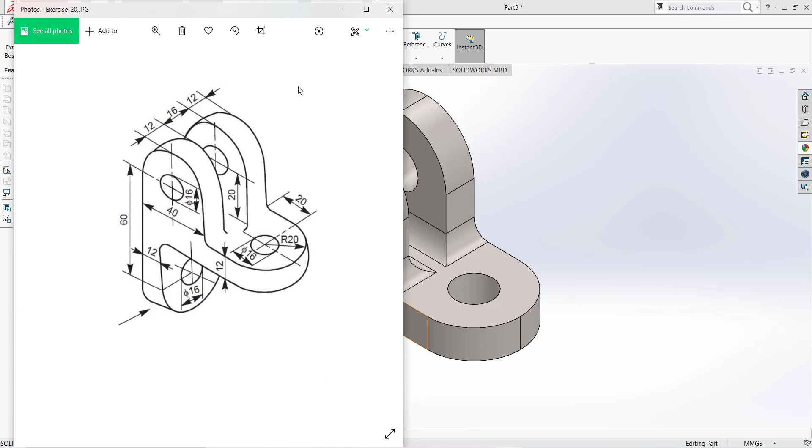Today we are going to make this exercise with the help of this sketch, and this is our exercise number 20 in SolidWorks. You can also download this exercise and this part from my GrabCAD link in description. If you have any doubts, please comment and subscribe to my channel for more tutorials.

So firstly we draw this portion, after that this one, and this is our last portion. This dimension is 40 millimeter and 40 millimeter, 80 millimeter length and 40 millimeter width.

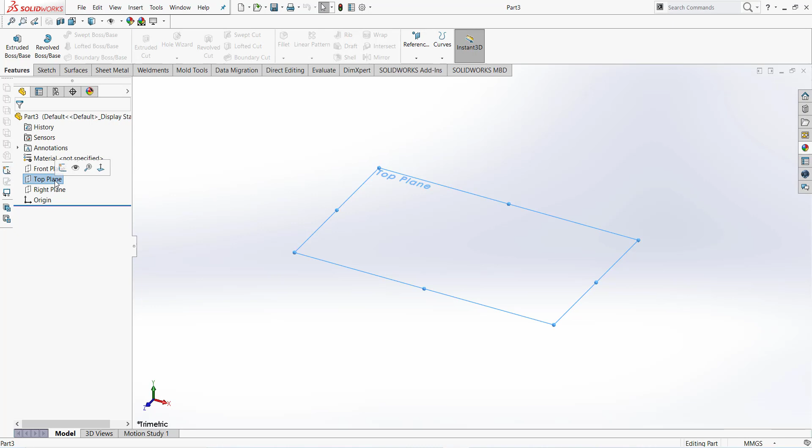Let's take a plane and draw a rectangle. Now dimension this is 40 millimeter and this dimension is 80 millimeter.

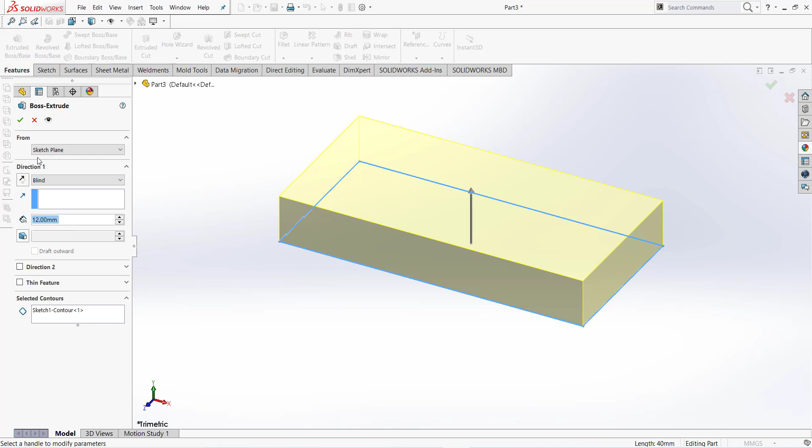Now extrude, length is 12 millimeter. Now fillet this portion on this edge and this edge, dimension is 20 millimeter. So first portion is ready.

Now we draw a 16 dia hole on this face. This dimension is 20 and 20 from center, the 40 millimeter, and this is also 40, and 12 millimeter thickness.

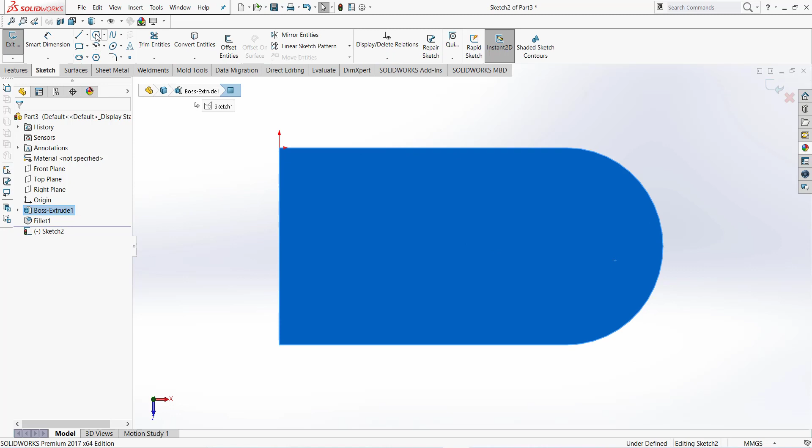Let's click on this face and take extrude cut and draw a circle. Dimension it, this is 16 millimeter. Finish sketch and through all, click OK.

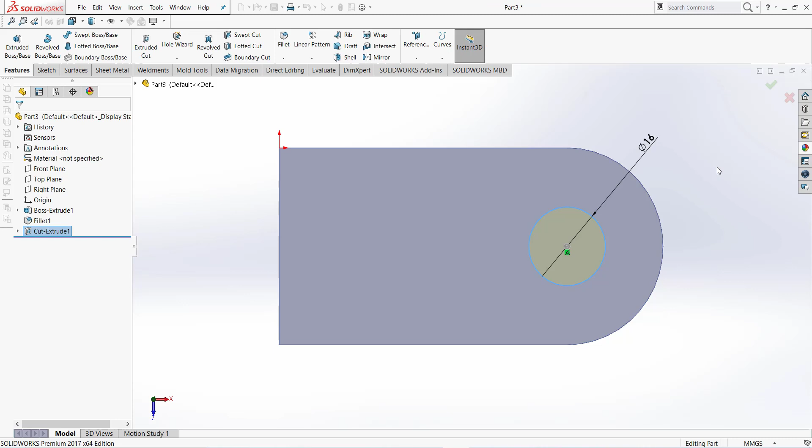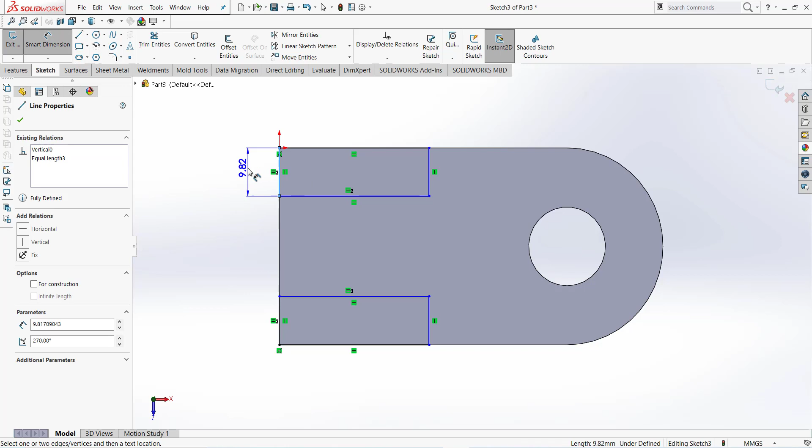Now go to sketch and draw two rectangles like this. This portion is equal and this one also equal. Now dimension, this dimension is 12 millimeter and this one is 40 millimeter.

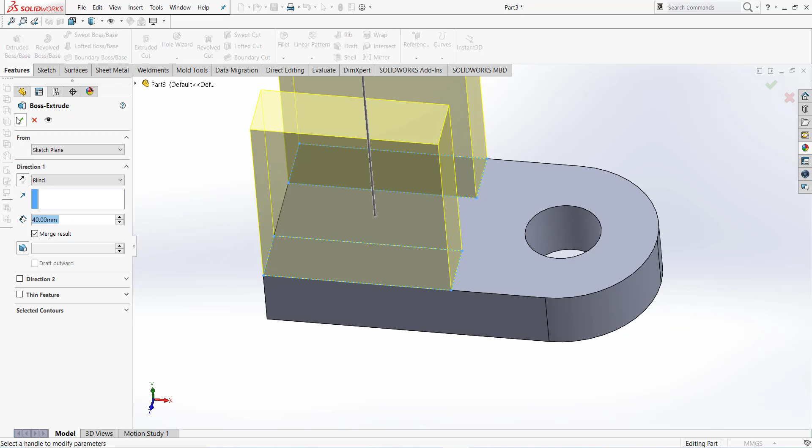Finish sketch, feature, extrude, and this height is 40 millimeter. Now fillet on this portion and this also. Click OK.

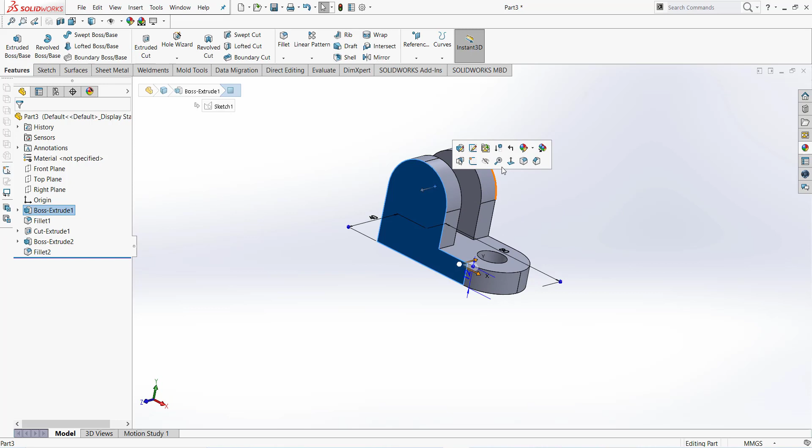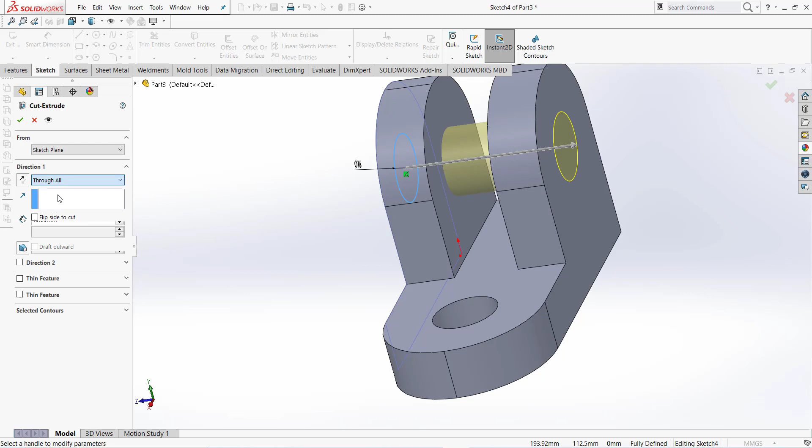Now click on this face and normal to, take extrude cut and draw a circle on this center, 16 millimeter. Click OK, and now through all, click OK. Second portion is complete. Now we have to draw this portion.

This center is 60 millimeter and 20 millimeter from this center, so 40 and 12, so 48 by 40.

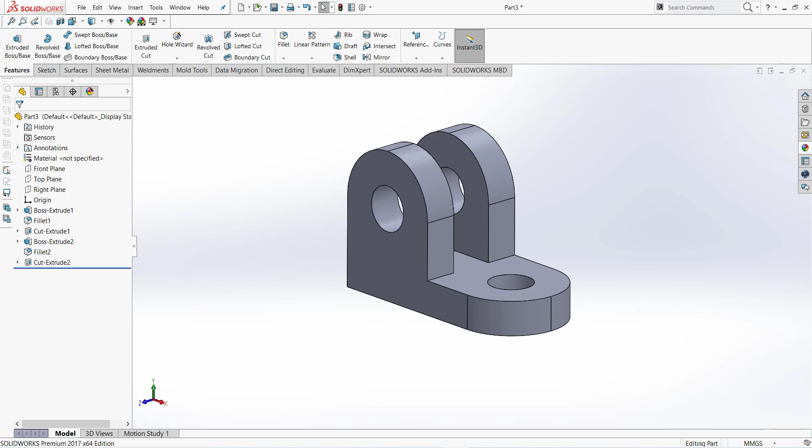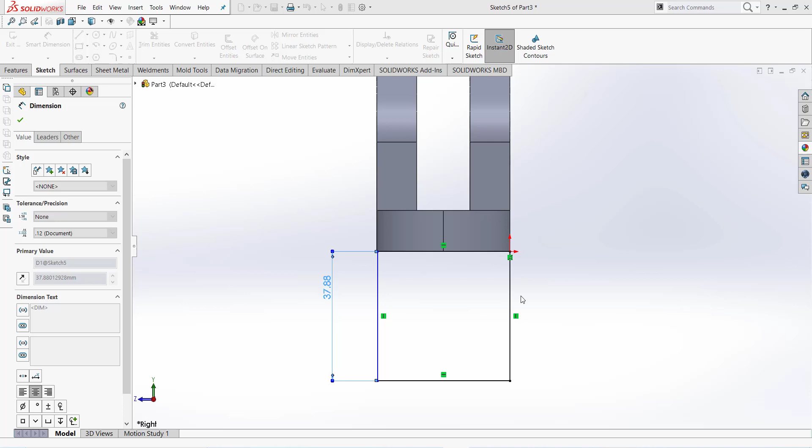So just click on right plane and normal to, and draw a rectangle. Dimension, this dimension is 48 and this one is 40 millimeter. Finish sketch, feature, extrude, click on this sketch 12 millimeter and OK.

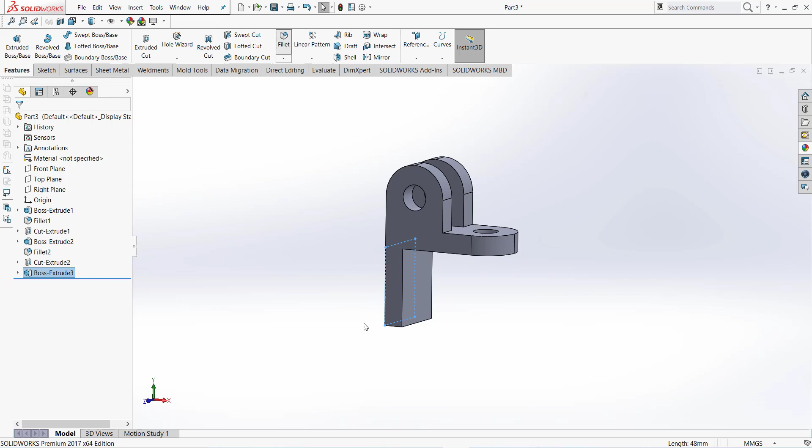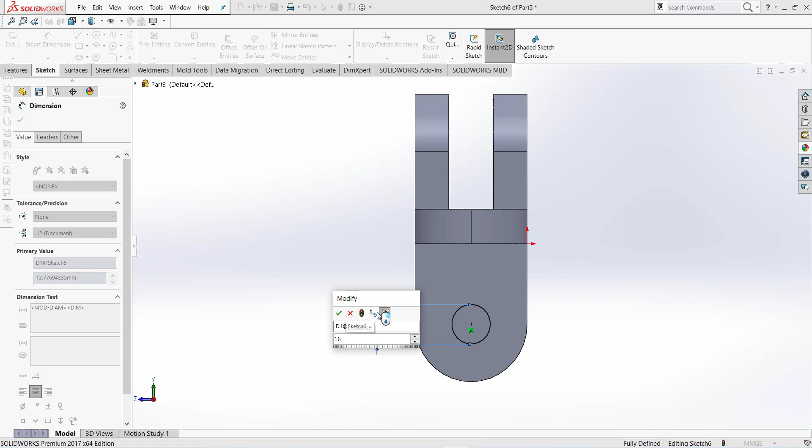Now go to fillet, click on this edge and this edge and OK. Now click on this face and normal to, take extrude cut and draw a circle, and this dimension also is 16 millimeter and OK. Now through all and click OK.

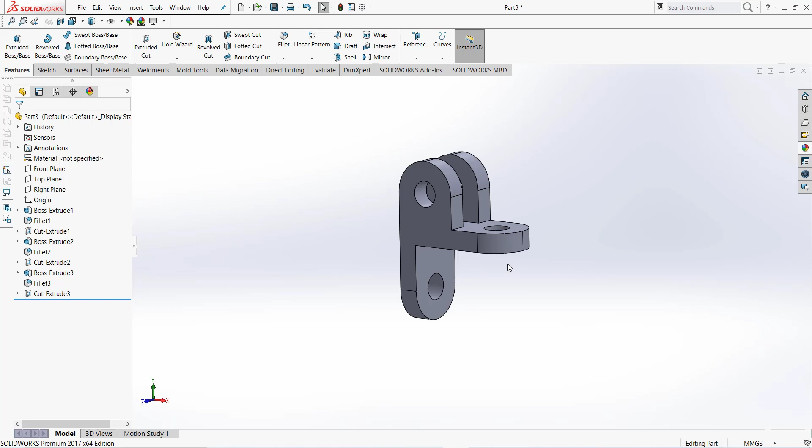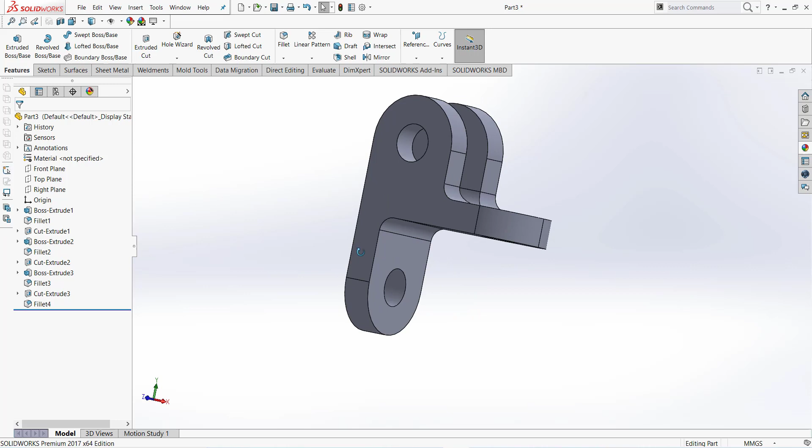Now we have to draw these fillets. Click on fillet and select this edge, this edge, this edge and this edge and this edge. Dimension is 6 millimeter. Click OK.

So our exercise is complete.